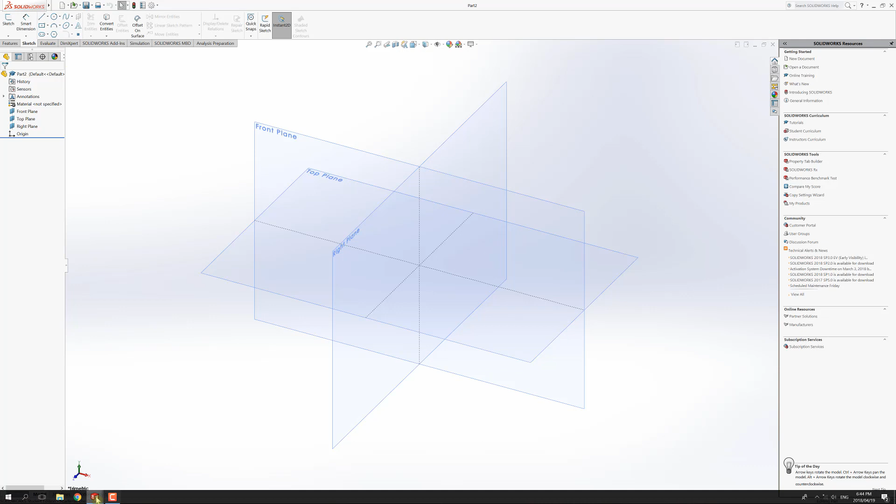Okay, so let's start off. Let's say sketch. Obviously the first section is a circle, and the dimensions were the inner circle is 36 diameter and the outer circle's diameter is 75 millimeters. Okay, and it's extruded back by 50 millimeters.

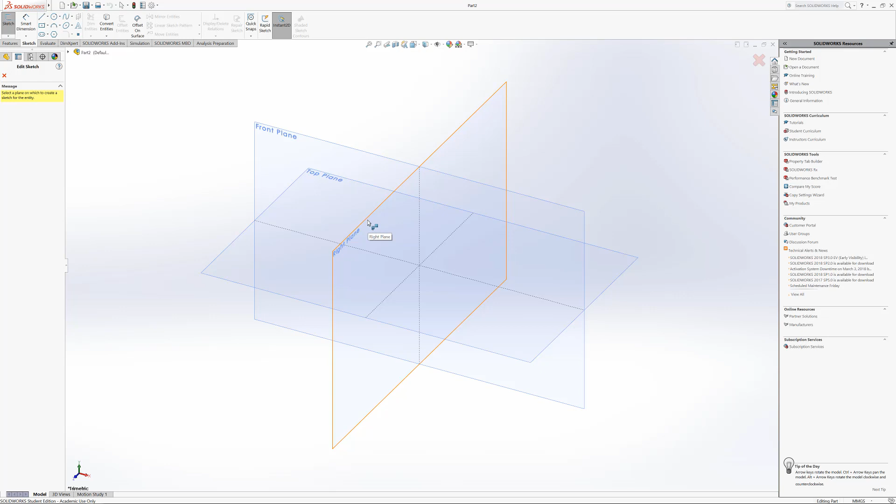So let's just go back to our drawing. You want to create a circle on the right plane, because it's the right plane feature which we've just shown, which is being extruded back from the origin. So let's start off from the right plane.

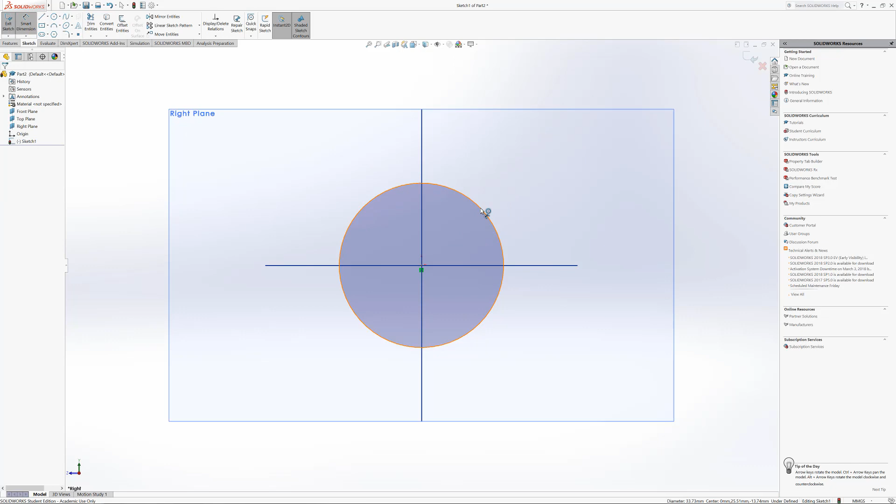From the center. Dimension for this was 75 diameter, and then features, it's being extruded backwards by 50. Let's just flip the direction so it goes back, because remember now the origin sits there in the middle. So let's say it goes back by 50 according to the sketch, and we just say yes.

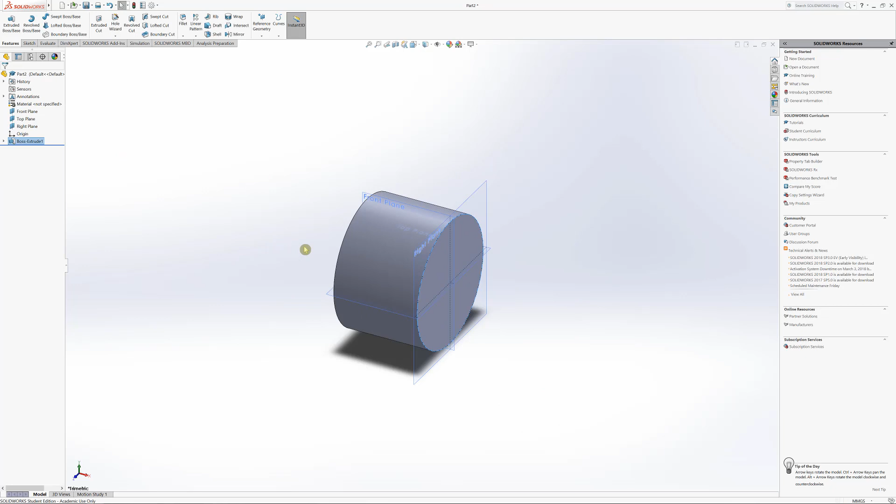Okay, now that's our first section. The second section, which is here at the back, this back section block here - what I usually like doing is you can either just draw a big block and then do all those little cutouts, or you can draw this U shape and then just do the side cutouts. So let's do the U shape today.

So basically it starts off exactly on that 50 millimeter mark which has been extruded back, and it's 100 by 125 the distance. So let's just go to our sketch.

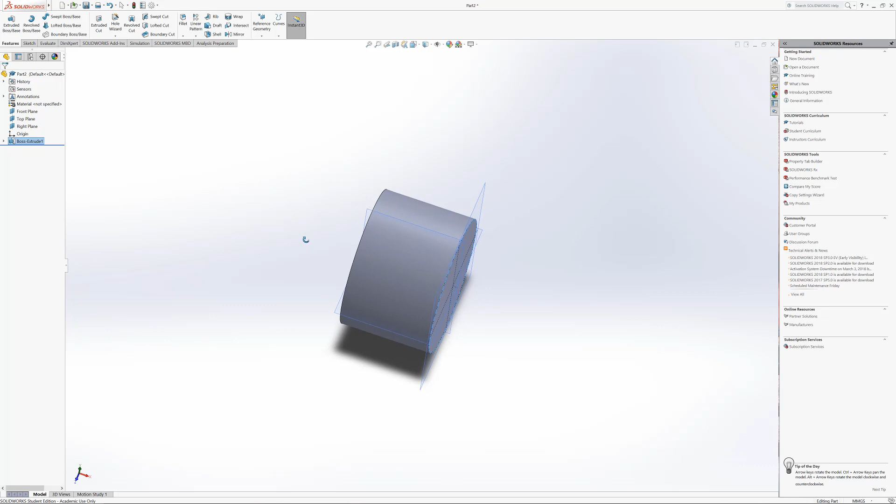Now obviously we want to sketch on our top plane. So let's say normal to, just zoom out a bit, go to sketch, just normal corner rectangle, because otherwise there's no center point we can use here. So let's just draw it and see how close you can snap it or get to the back of the circle.

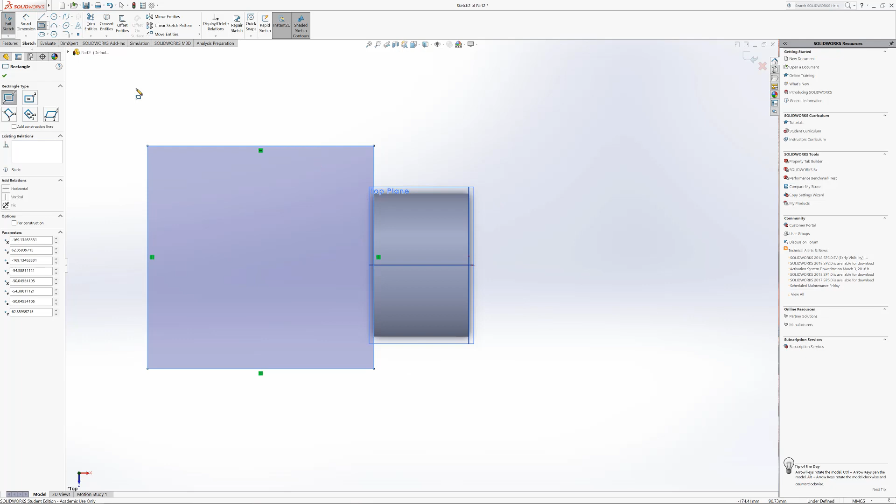Okay, let's try again. So it's basically going to be from there to there - you can see it's very small. Just make it 0 to make sure it's snapped onto the back of the circle, and it also defines this now, turns it into black, which means it's defined this side.

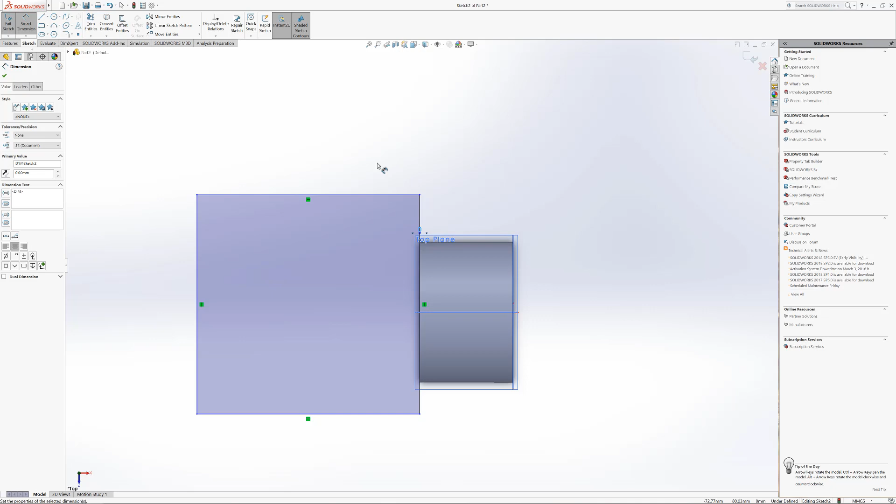Okay, so now what we can do, we set the distance - it's 125 the length, and then the thickness was 100. But before we enter that value, let's just add that U shape which we want somewhere there.

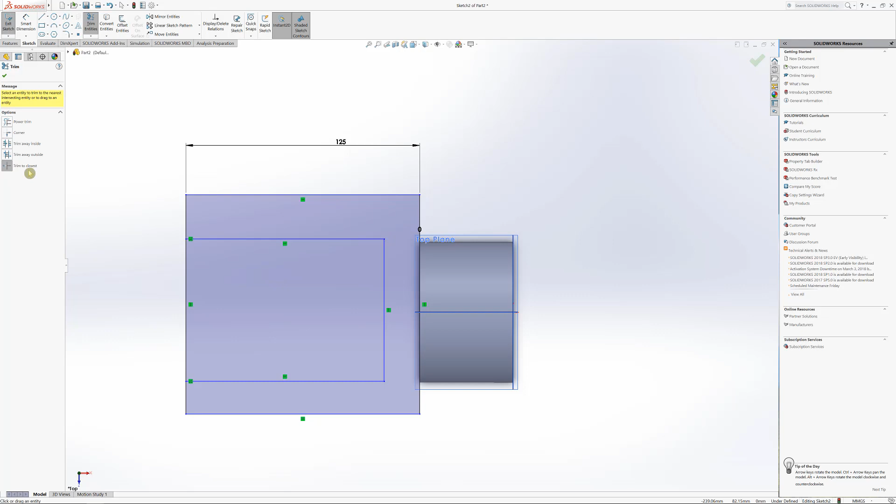Okay, and now I'm going to show you today how to trim entities. It's also very easy. So what you can do is just go here by your toolbox, somewhere it says trim entities. As you say trim entities, it's going to give you a couple of options - just choose the one that says trim to closest. It means it trims to whatever is the closest point or other line. So as soon as you trim there, it cuts out that and gives you the U shape which you want.

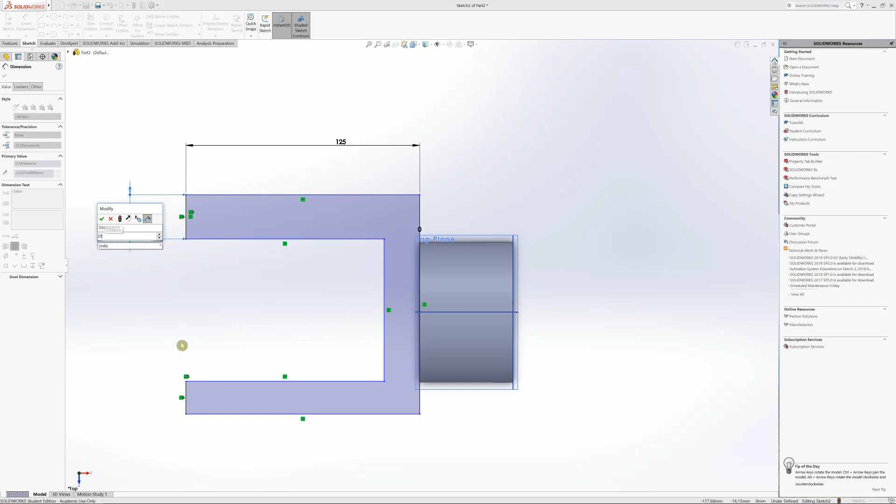Okay, so now let's add some more dimensions. So basically this distance to that distance was 25. Okay, let's just say 25. That one was 25 as well. This one over here is also 25. Okay, so now that's sorted.

Then also just add this dimension here in the middle - remember now I said it's 25 plus 25 plus 50 to give you 100. And then also just add a dimension to say where it starts off.

Now this is a very important section. So before we add this dimension, let's just delete it. So let's just go here - so it's 25, and this section here is also 25 by 25.

Now as you can see, that section there, before the circle starts, from that circle or edge to the outer square edge is 12.5 each side. So 12.5 times 2 plus 75 should give you 100. Just to give an idea.

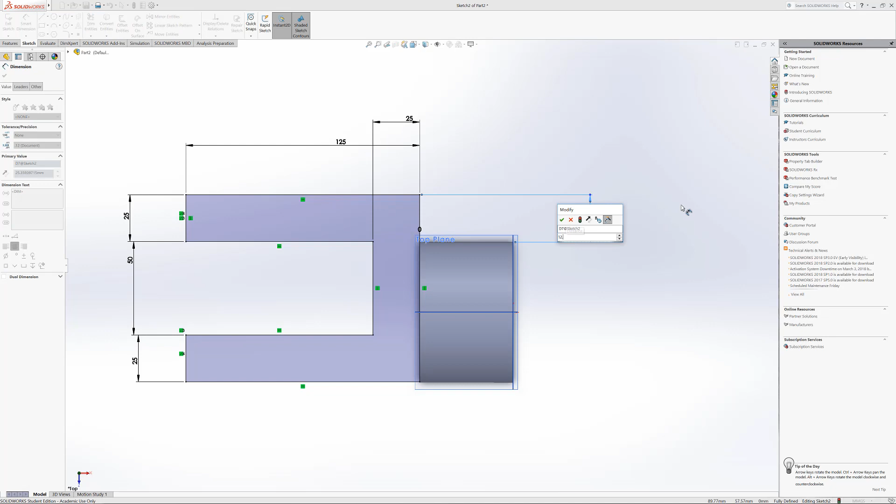Just go back to our sketch. Let's just add that last dimension. So I said 12.5 - you can also just double check this side to see if you've been doing your values right. So basically 12.5 as well. Okay, so that means you're on the right track.

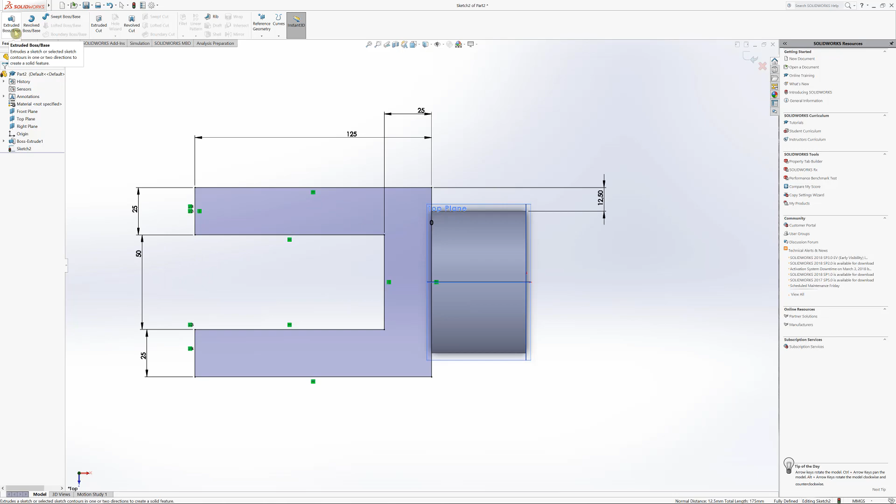Now to start off with the extrusion again - as you can see, all the lines are dark, so it means it's defined. So you just go extruded boss base. You just rotate it to see where it's extruding towards, so you can see it's only extruding towards one side. So just go mid plane, make sure it's in the middle, and just say 100, because it's 100 in height. So let's just say yes. If you go back to the sketch, you can see the height is 100 here on this side.

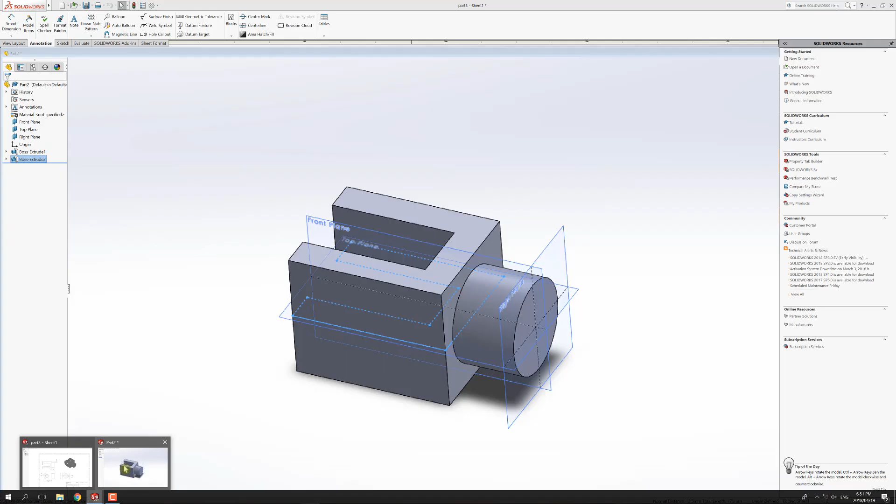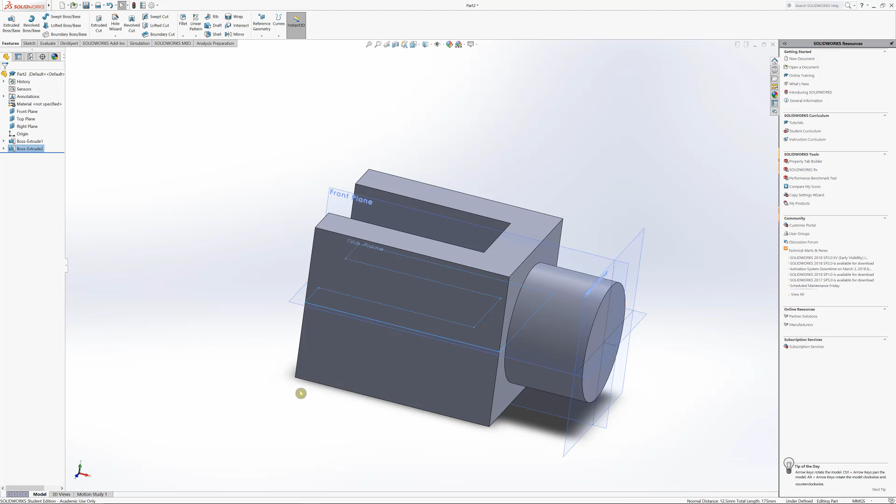So back to our drawing. Now the other things we need to include is a bunch of circles and cutouts. So the first thing you can actually do is we can set a radius here on this side by making, either you can make a physical cutout, or you can use a 3-point tangent arc, and then just

make sure you connect all the dots to make a nice cutout. For me, the easiest way is just to create a fillet with the radius of the actual sketch. So I want to do that edge, bottom edge, and that bottom edge. And then the radius of each one is going to be 50. Can you see that it creates a nice smooth circle for us?

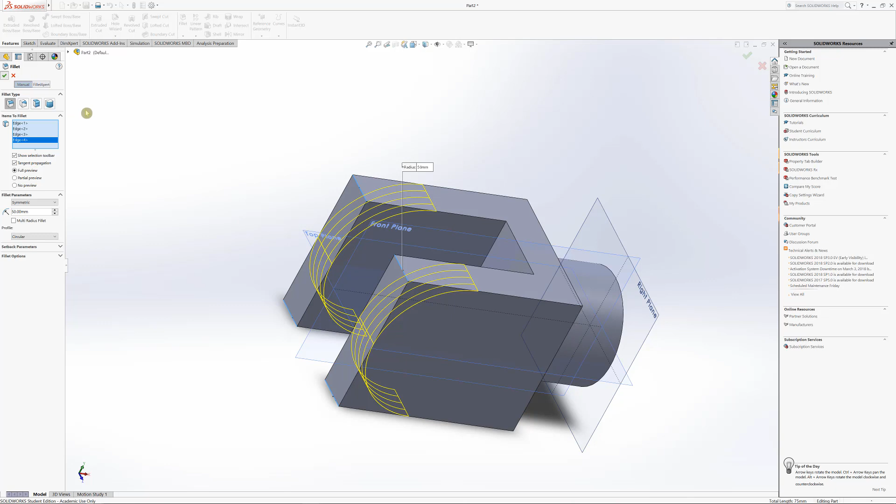So as soon as we say yes, it does give us that radius, although it does give us this extra line here, where if you created the 3-point tangent with this 3-point arc, you would have maybe not gotten these lines here at the end. These lines you still would have gotten on top.

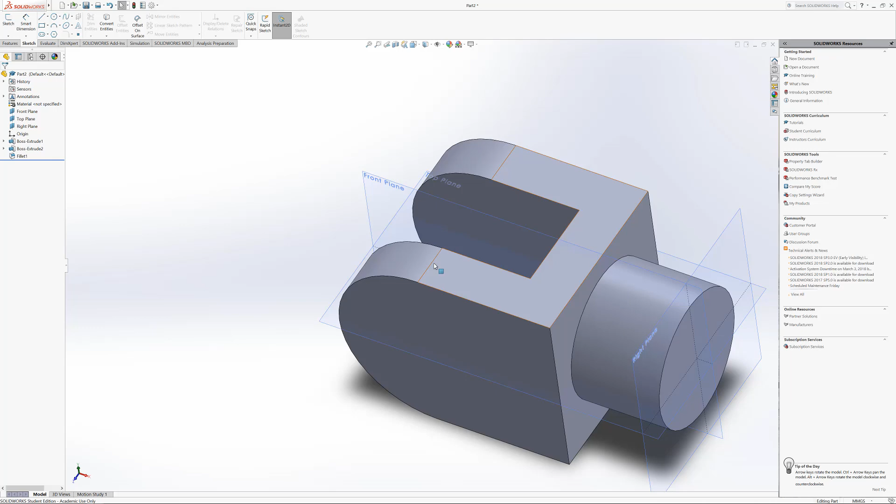So basically I used just the fillet radius to create those arcs, with a radius of 50. Now for your cut or circle cutout, that small little feature there, it's also a diameter of 50, and it goes through both sides. Let's just go back to our sketch.

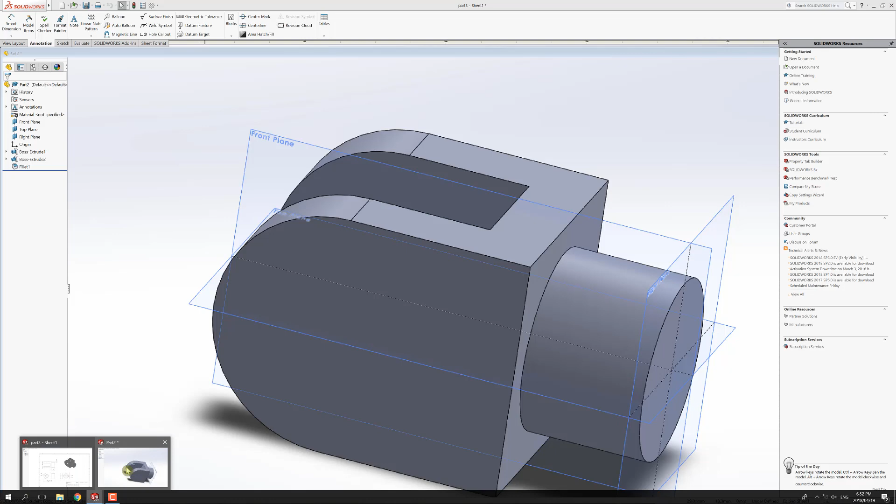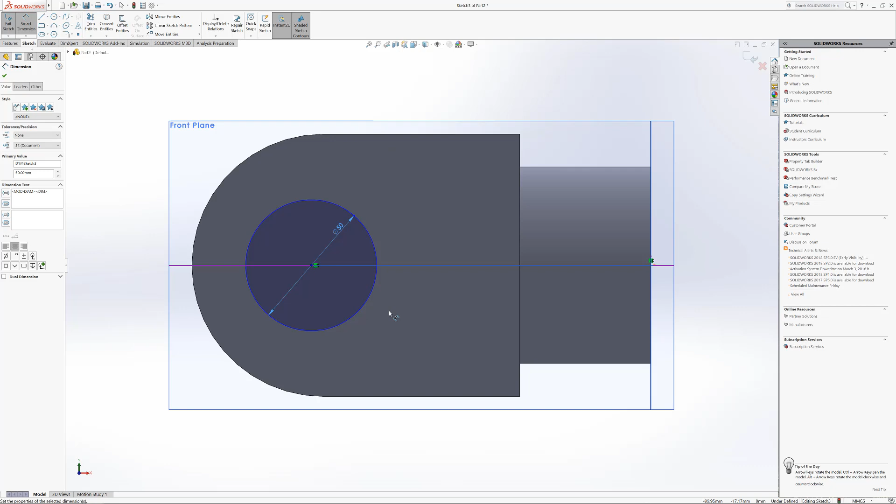You can click on the sketch, you can say normal to make it easier for you. I'm just going to use a center circle to make sure it snaps onto this middle plane. Add some features. I think it was 50 according to me. And then it asks for a value, because it's not fully defined where the circle will start, from that corner to that edge, or from that side to that center point.

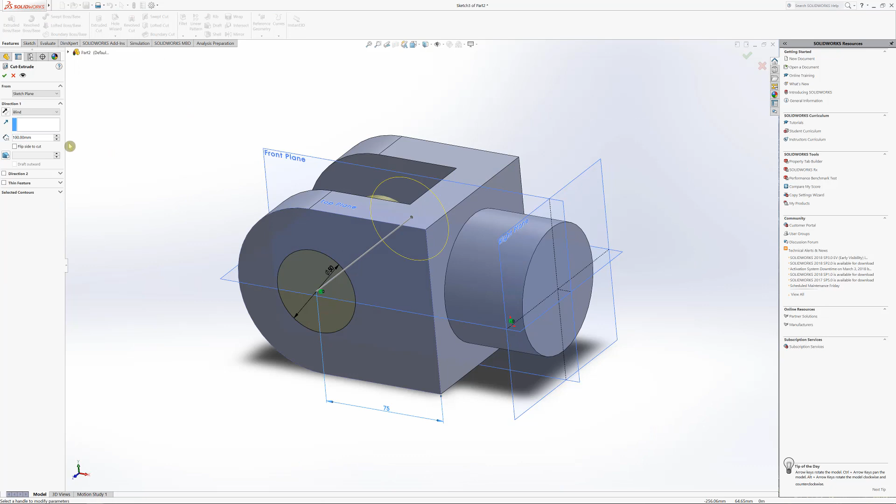So I already know the value, it's 75. We can double check that now, and then you just go to the extruded cut feature. As soon as you rotate it, you can just say through all, because it goes through both sides. You can just say yes. So there's your circles at the back.

So let's just make sure of that distance where the circle is cut. Can you see it's from that edge to the center? It's 75 millimeters. Now the last section, there's a smaller cutout here in the middle as well, which is 36 diameter, and that also means it only goes about 50 back.

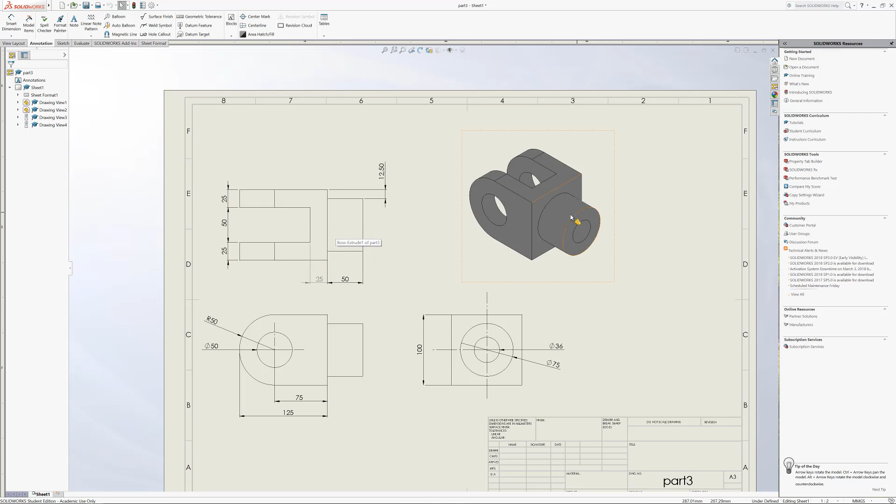We can actually show that if we show here in detail. Sometimes it picks it up, sometimes it doesn't. So it also only goes back 50, it doesn't go through all, otherwise you would have seen a hole at the back as well.

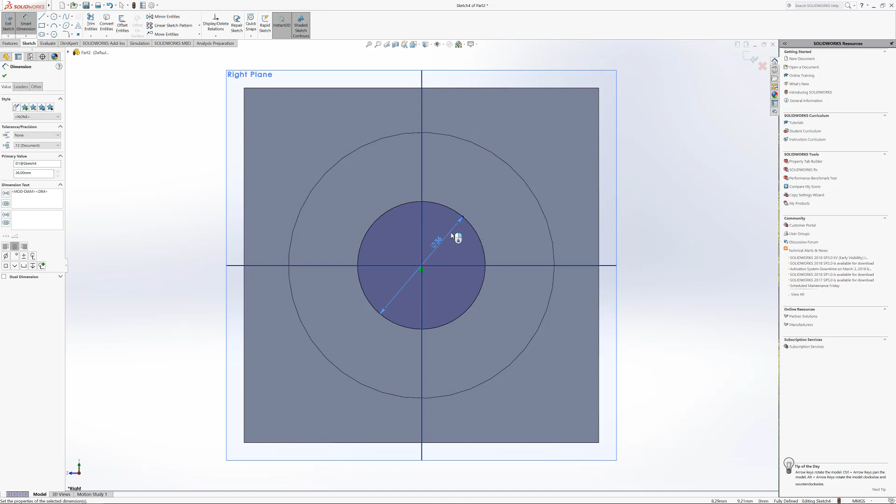So let's just make this component. At the front, normal to, we want to sketch another circle, and then we want to dimension that circle. It was 36 the diameter, and then the features, extruded cut.

It went back for 50 millimeters. Okay, so it went back for 50. It stops exactly on this face, so it doesn't go further than that back. So basically there's your component which you've just created.

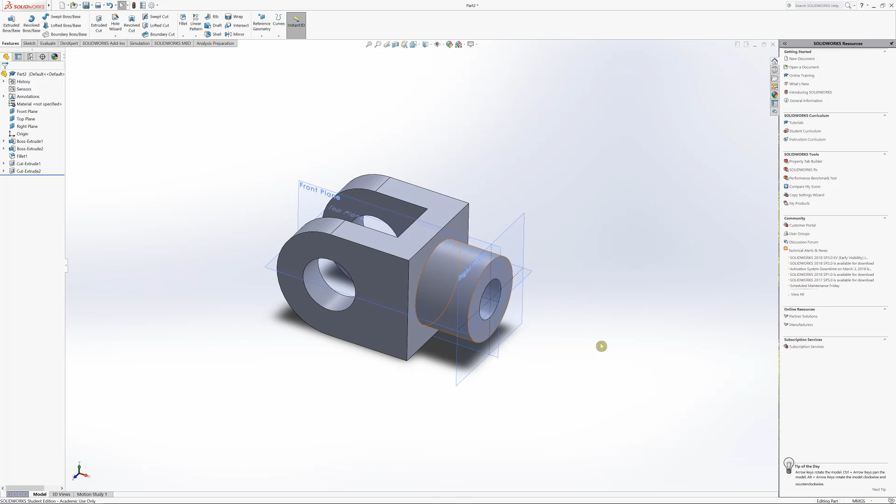As you can see, it's a bit more intermediate level than the previous one I've shown you. This is also only using cut and extrude features. Trim entities you'll definitely use in a cut and extrude feature. Like I said, this is not the only way to do it. I'm just doing it this way because it's easier for me.

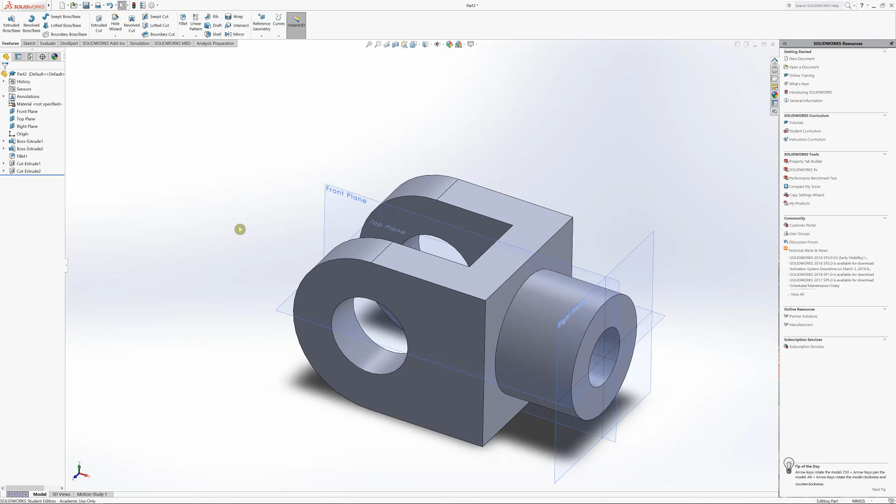There's a thousand other ways you could maybe do it. Like I've said, you can create a block and then just do a cutout. Instead of making the U, you could have used a cutout circle sketch there as well, instead of doing the fillet radius. So there's a lot of things you could have done differently.

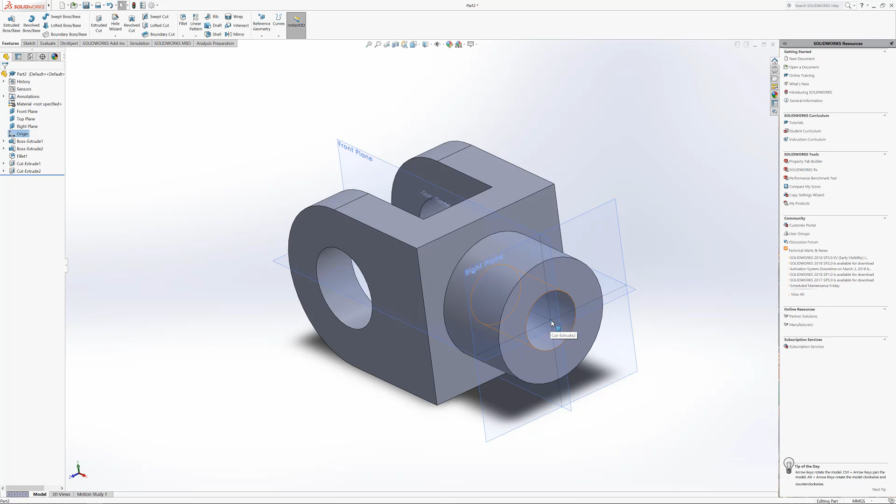But as you can see, just to give an idea, there's our origin, that little blue line or blue point there, and then from that, all the way back, I've extruded a sketch. So if they, for instance, give you a test origin to start off, basically that's how I did it, and that's how you should go about it. So just to give an idea, there's what it looks like.

So basically we are finished with our drawing.